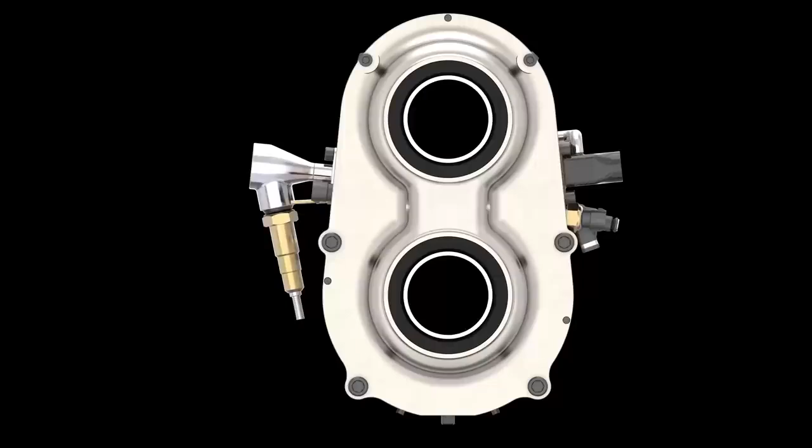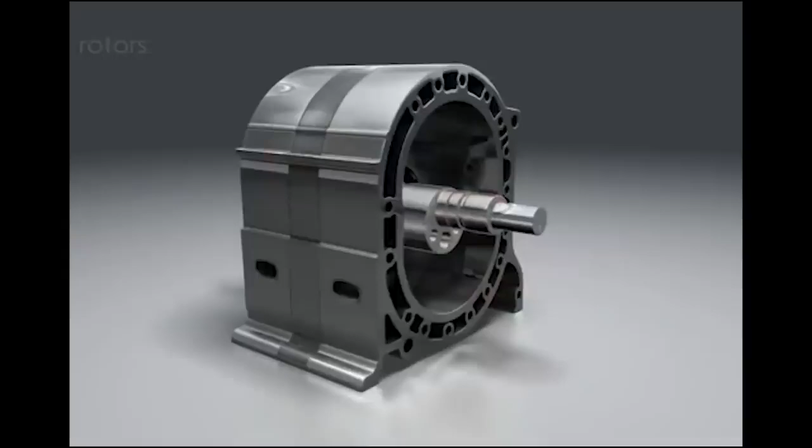It's called the Omega 1, and it's a rotary engine with no seals. It has barely any moving parts and has almost zero losses in the combustion cycle. With a traditional internal combustion engine, you lose stacks of energy through heat and friction. While with this new engine by Astron Aerospace, they aim to eliminate nearly all losses associated with the internal combustion engine.

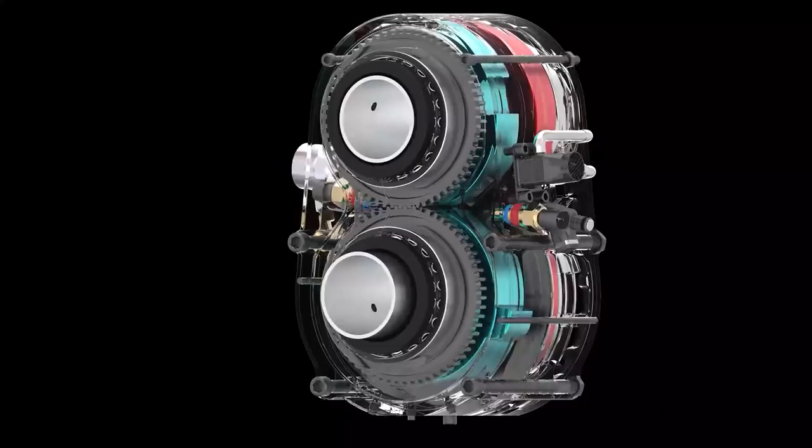Now, when I initially looked at this engine, I thought, well, this isn't that cool. It's really just a fancy high-revving Wankel rotary, like the ones you'll find in a Mazda. While I looked into it more, I realized it really isn't. It's a rotary, but it has zero seals, and the engine is super efficient, super lightweight, and doesn't take up much space.

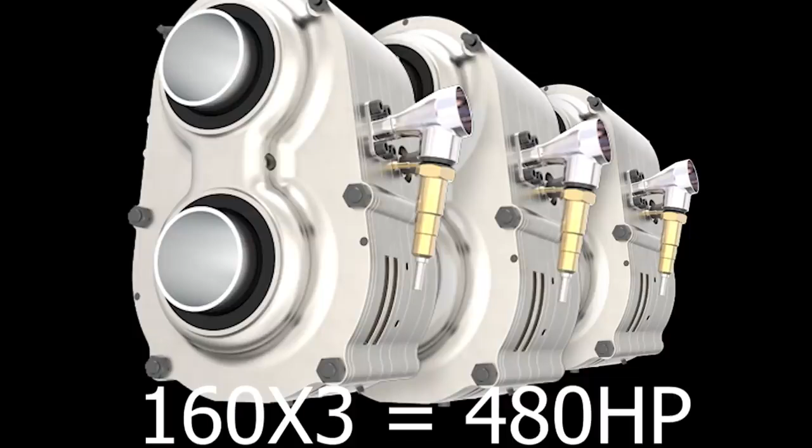A single 16 kilogram engine develops 160 horsepower and 320 Newton meters of torque. This thing revs all the way to 25,000 RPM, which is insanely high for an internal combustion engine. All the power of a single engine is multiplied by the number of engines that may be placed end to end. So let's say you have 3 rotors, you would have 480 horsepower, and the total weight of all 3 motors would be 48 kilograms. I mean, that's nothing, and it makes a whole bunch of power.

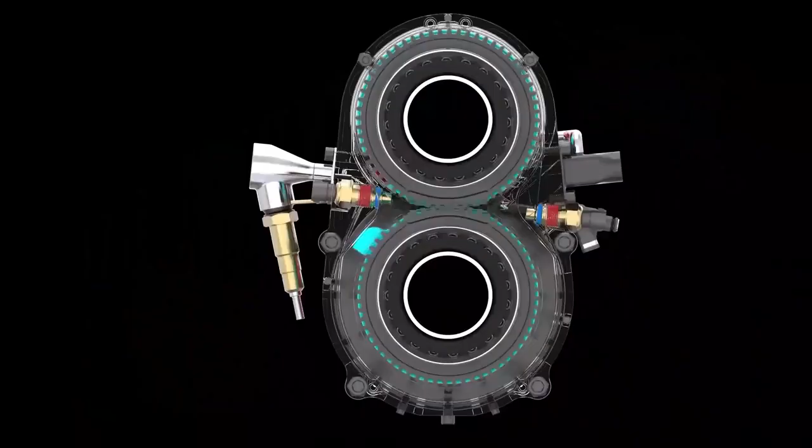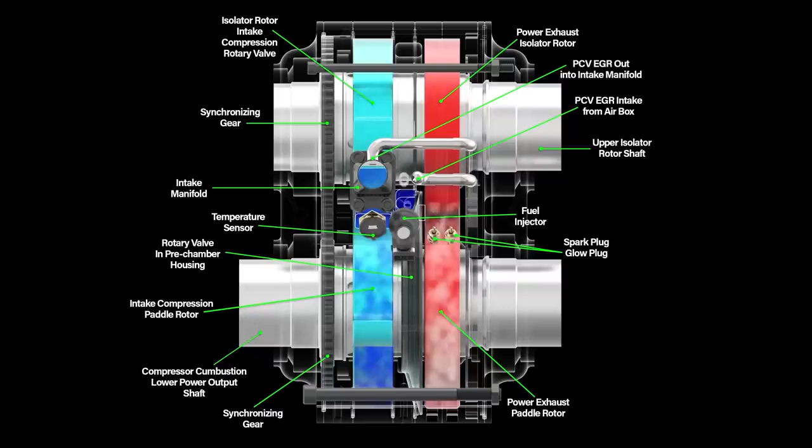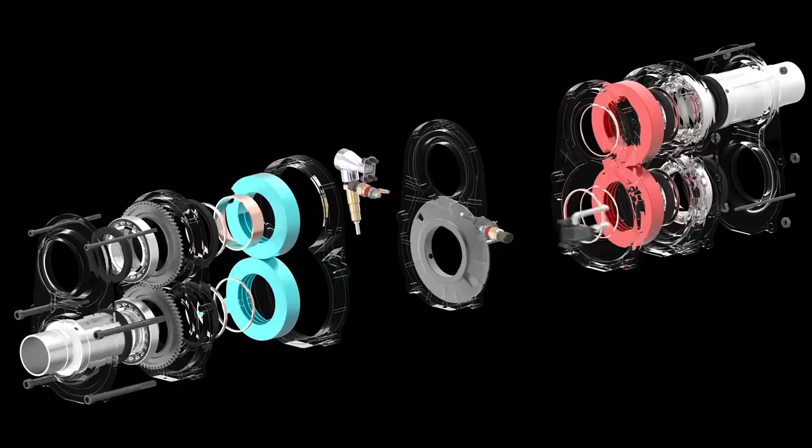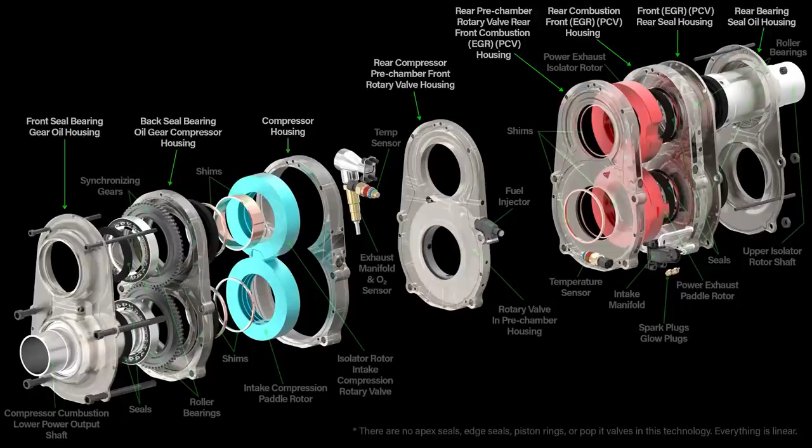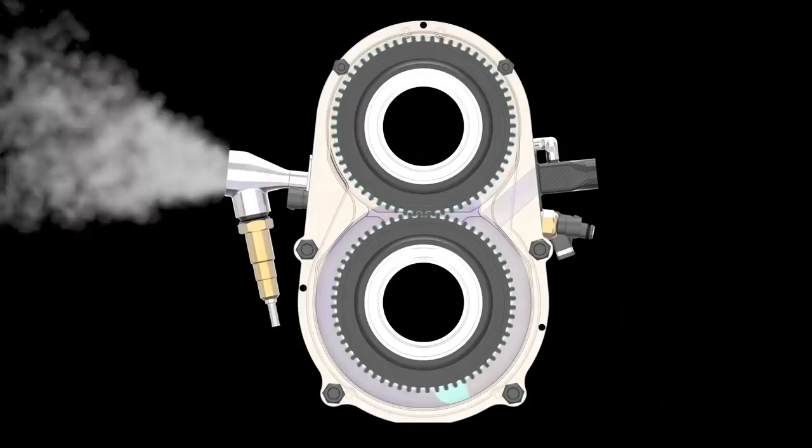Now this engine has no seals like I previously mentioned, but how? How does it keep the compression and everything high if it has no seals? Well, very tight tolerances are key for the lack of rotor seals, as are the higher RPMs involved, since there is not enough time for the air to leak when running. The engine also features a supercharged air intake running at crazy high pressures. Now, where most internal combustion engines run between 10 and 20 psi, this engine forces in over 200 psi into the motor.

Now, Astron Aerospace recommended using hydrogen as a fuel source for running the engine, and in doing so, the emissions will be practically nothing. Since hydrogen weighs so little, it won't add very much weight to a car. A lighter car means the engine doesn't have to work very hard. This tech is freaking awesome.

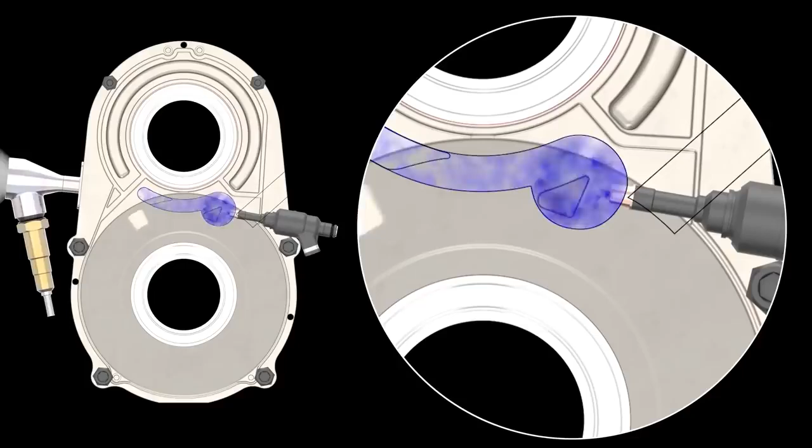Now, one more cool thing I thought I had to mention. When you drive fast, the engine will combust on every rotation of the rotors, giving it the maximum power and maximum torque. But let's say you are just cruising at a steady pace. The engine can skip fire. In other words, it will only ignite on every 5 or 10 rotations, which means you just save fuel and the car will still drive perfectly fine.

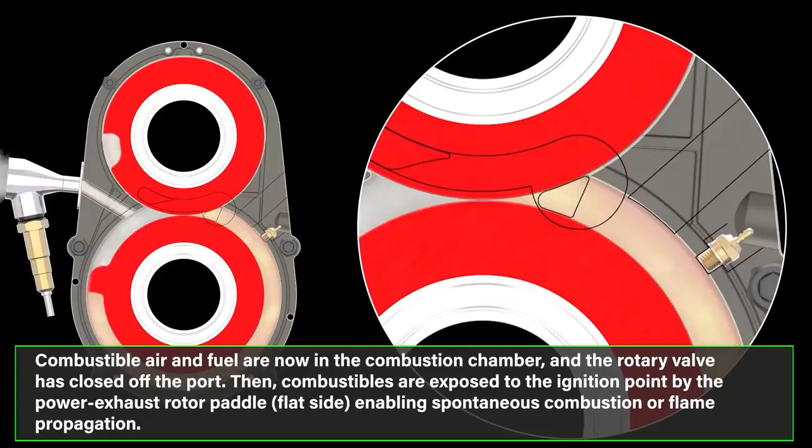Now imagine having a hyper efficient, super lightweight engine powering your car by burning hydrogen. It's good for the planet. These engines weigh practically nothing and they are super small, so you would have more space in normal cars. And then for performance cars, you can have multiple motors stacked together, making loads of clean power.

Things like this show that there is still a bright future for the internal combustion engine, and I feel as time goes on, everybody will eventually see it.

But what do you think? Are you still on the electric bandwagon, or do you think things like this - not necessarily just this one, but things like this - give us multiple ways of keeping the internal combustion engine alive? Sorry, I'm really excited because I think this is gonna work. Not just this, there's a bunch of technologies like Yamaha building the hydrogen V8 normal internal combustion engine. There's just so many options and I feel good for the future.